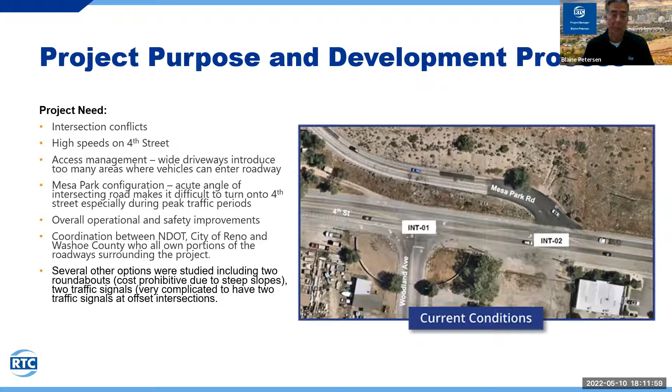The Mesa Park configuration's acute angle of intersecting roads makes it difficult to turn onto 4th Street, especially during peak traffic periods. Overall, there are operational and safety improvements requiring coordination between NDOT, City of Reno, and Washoe County, who all own portions of the roadways surrounding this project. Several other options were studied, including two roundabouts, which was cost prohibitive due to steep slopes, and two traffic signals, which is very complicated to time with offset intersections.

The intersection improvement study conducted in 2019 recommended limiting access on 4th Street to reduce conflict points for entering vehicles, providing bicycle and pedestrian facilities within the project limits, and using a roundabout to provide traffic calming geometry to reduce speeds on 4th Street for entering vehicles. The roundabout design accommodates truck traffic as well as emergency response vehicles.

Movements were modeled via computer simulation, which can be viewed on the project website. The project also includes lighting, specifically in conflict areas including pedestrian and bicycle areas. Minimal landscaping is recommended for any landscaping areas to avoid long-term maintenance costs. Right-of-way was required for this project and is in place.

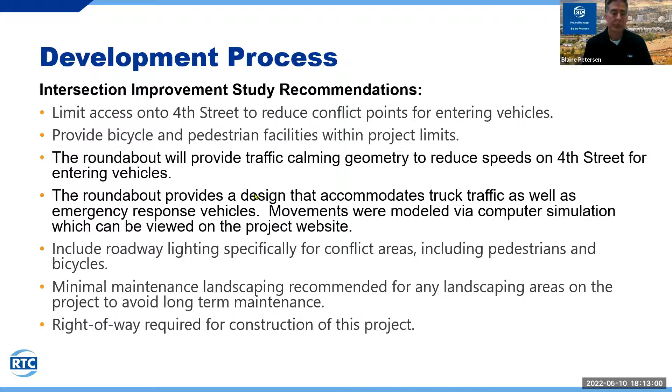The Mesa Park intersection design vehicle was the Reno Fire mid-aerial fire engine, and the roundabout design itself used a WB67, essentially an interstate truck that you see on freeways all the time. The existing drainage patterns are to remain the same; we're not disturbing what's out there.

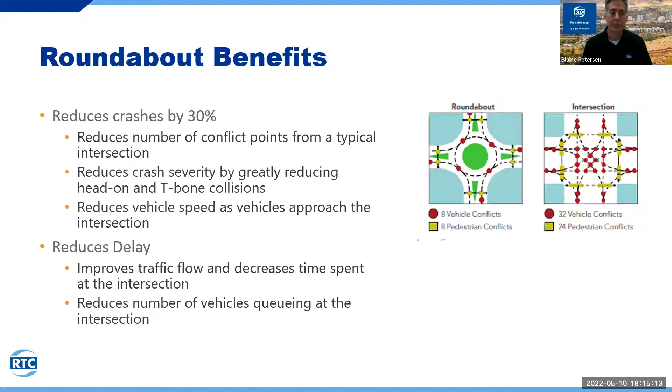Some of the benefits of roundabouts: they reduce crashes by up to 30% because they reduce the typical number of conflict points versus a standard intersection. They reduce crash severity by reducing head-on and T-bone crashes, and reduce vehicle speeds as vehicles approach the intersection. Roundabouts also reduce delay, improve traffic flow, decrease time spent at the intersection, and reduce the number of vehicles queuing.

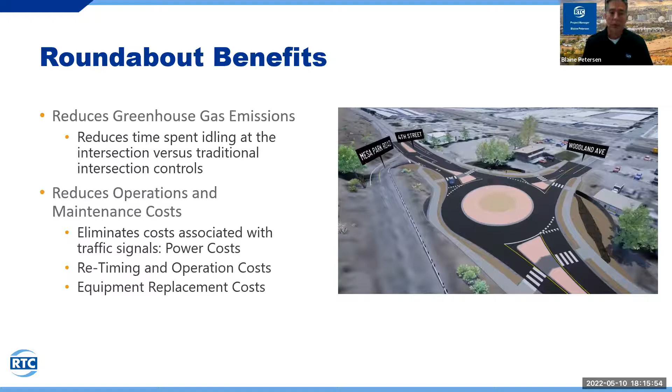Roundabouts reduce greenhouse gas emissions by reducing time spent idling at an intersection versus traditional controls such as stop signs or traffic signals. They also reduce operation and maintenance costs, eliminating costs associated with traffic signals and power, even though we will have street lighting using LED lights, which use less power. With traffic signals, there are also costs to retime them, operation costs, and equipment replacement costs.

Roundabouts also increase pedestrian safety. They reduce the time at risk for pedestrians by having two-stage crosswalks on each leg using pedestrian refuge islands. Pedestrians only have to look in one direction for each crossing, and vehicle speeds are reduced at the crosswalks. Roundabouts also enhance aesthetics and provide opportunities for community and corridor placemaking, softening edges and adding visual appeal by using central islands for landscape features and decreasing the amount of pavement.

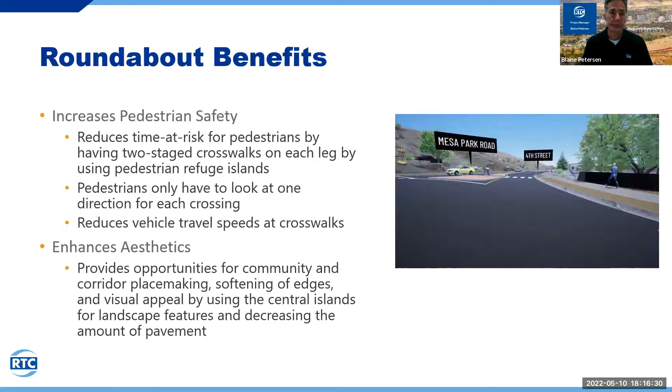The project is currently being advertised for construction bids. The bid opening is this Thursday, May 12th. I anticipate the start date as June 6th, with an 85 working day contract, so we should be completed sometime in October of this year. That's it—if you have any questions, I'd be happy to answer them.

Mac Rossi for the record. I'm kind of familiar with that area there. What?

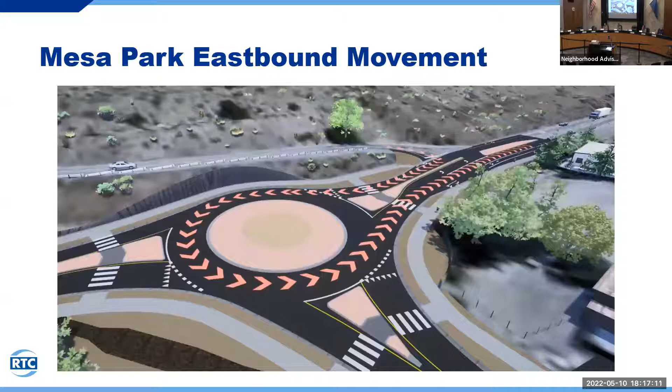This is the old highway, if I'm not correct. You are correct. Speed limit is 50 miles an hour. Am I correct on that? Or I may be wrong, but I think it's 50 miles an hour. Is something going to be posted in advance on both sides to alert people that they got to go in a circle? Absolutely. What is that going to be?

As with any other roundabout intersection, there are warning signs prior to the intersection showing there's a roundabout ahead with a diagram of a circular roadway, as well as street name signs directing traffic to the various roads. So what do you anticipate as a speed limit as you approach the circle or go around in that roundabout? The advisory speed limit will be 25 miles an hour. And that'll be posted in enough suitable time for people to not get dizzy, I guess, huh? Yes. Okay, thank you.

Shirley Borchard for the record. My only concern here, I do travel this street every day, morning and night, so I get to see the full impacts of this area during rush hours, if you will. My big concern would be specific to the evening and afternoon, and it's been a concern of mine for several years, for Mayberry Park, Mayberry Drive, which is just another maybe half mile up the road here.

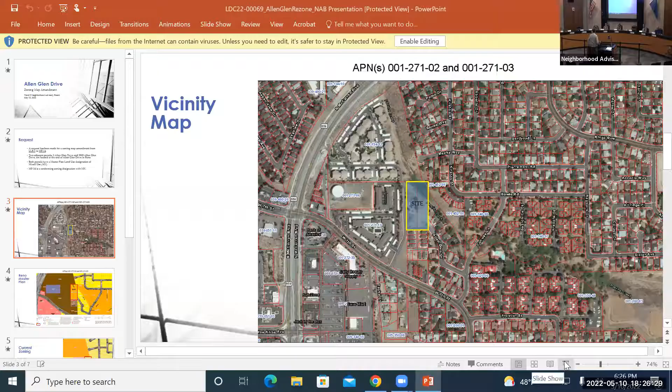Good evening, for the record, John Munson with Venture Engineering. I'm here representing the applicant, who are also the property owners. And I think this is my... yes, okay. I'm sure that works.

The site is located, it is a request for zoning map amendment on 2 1-acre parcels to MF 14, currently zoned LLR1, but very out of place, not in conformance with the master plan. The master plan actually only has 2 compatible zonings: small lot residential SF 11 and multifamily 14. So it's a mixed neighborhood master plan, a transition master plan from residential to multifamily, sort of a medium density master plan, as is the zoning of MF 14.

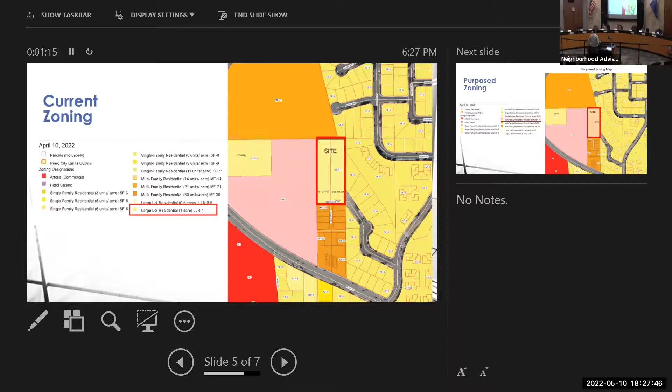So the site is located at the end of Allen Glen Drive, which is located off of Conway Drive, which is located off of West 7th Street. And the site is illustrated there, the 2 parcels next to each other. That's the master plan, which is MX. Current zoning LLR1. And then how the zoning would be after the amendment, if approved, to MF 14.

The site right now, those 2 parcels are highlighted in red there. One parcel is completely vacant. The one on the left does have a small house. It's currently occupied, it's a rental for the owners.

The owners are actually the developers of the 12 lots to the south, 12 small homes. And if they would be the ones developing this, it would probably be a similar development with a street going down the middle, lots on each side. They built the homes and currently own and rent several of them. So if they were to proceed with this development, it would be a similar product. But in the MF 14, it can be apartments or townhomes, it just depends on what happens in the future and what's the best use of the property.

That's all I have for slides.

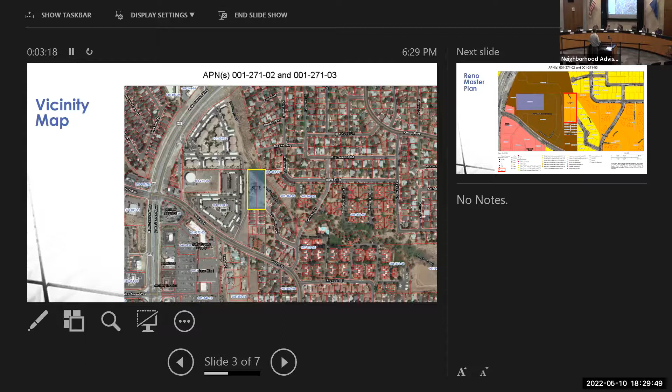In terms of support for the project, because of where it's located, it has access to existing streets, water, sewer, gas and electric, and proximity to shopping—somewhat of an infill site. I'd say it's infill because there's development all the way around it. Technically it's a vacant piece of land, but it's also infill in that it has access to all these utilities. It's not a burden on the city infrastructure to develop. It's really just an enhancement of the infrastructure that exists, bringing it up to a standard to serve additional units if required.

But there would be no road improvements other than on-site; improving the on-site road would be about the only roadway improvement necessary. RTC has a bus stop close by, so there's support for higher density.

This is in conformance with the master plan. The previous master plan was also similar to MX—it's always been planned to have somewhat medium density on this property. As you can see, we've got apartments to the left and to the north. There are townhomes across the drainage way, single family small lot to the south, and the old 6,000 square foot SF3 lots to the east.

The Peavine Drainage Way runs through the site and takes up about 20% of it, so 20% of the development is guaranteed to be open space along the drainage way. You can see the willows there—it's up above to the north, and it's pretty disturbed and barren there, but through the site there's a nice stand of willows. Those will be preserved; that will never change.

That's all I have. Any questions? I'm here to answer them.

Billy Borchard for the record. My first comment is always, have you had communications with the residents that surround the property currently? We have not, other than the people to the south who are renters of the owners. So they live there, but if everyone was notified, we were hoping that if residents had issues or questions, they would bring those forward tonight. There's also the opportunity at the planning commission. If they didn't have the opportunity tonight, they can write letters or emails, but we have not spoken to any of them.

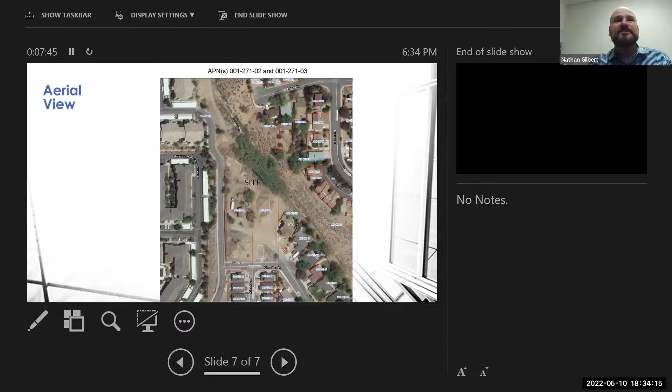Hey, Nathan Gilbert, Senior Planner. I just wanted to add, probably a little over a year ago, we started adding courtesy notices. When we receive applications, before we've even reviewed them, we send out a courtesy notice with the project description, and it has the tentative neighborhood advisory board date as well as the planning commission tentative date. My understanding from the planners is we've received several inquiries from the community on this already, but that's just an initial courtesy notice to let residents know a project has been applied for and advises them of future hearings and the neighborhood advisory board. Great, thank you very much for that clarification, Nathan. I appreciate it.

What I was saying is that it just looks well trafficked. So it appears to me, and I could be completely incorrect because I'm not familiar with the site, but I'm wondering if the people on the east or west are trying to get over to the apartments, vice versa. Are people trying to traffic this property right now?

No, maybe it's a closed off dead end, there's a fence in the back. Yeah, there was construction during the development of the subdivision to the south there. Dirt was placed, stockpiles were placed on there. Since then there's been work, there's still 2 lots to be constructed. 2 lots were built about 18 months ago, and there's still 2 lots left to build homes on. So there's still active construction activity back and forth between the two, but it is fenced off at the back.

The only reason I was mentioning it is we just had a similar project a couple months ago come up with large warehouses actually. And one of the workarounds for the residents around there was to do a little path around the back side of it so they could still get by without getting on a major road. So just maybe something to think about. That's all I have.

Bryce Chisholm: You say 14 units per acre, so I'm guessing it's 28 units. Is that what you're thinking about building? The maximum would be limited, the drainage way actually subtracts some density. I estimated about 1.6, maybe 1.7 acres of density. So you're looking at, I think it was 22 to 24 units. If it was multifamily, townhomes, it would probably be a little less just to fit them on there. If it was a similar product to the subdivision that's there, it would probably be more like 14. So it's just the size of the dwelling and whether it's detached, attached, or in a two-story building, and that's another important factor. MF14 only allows two-story, so it can only be two-story if it were to be apartments.

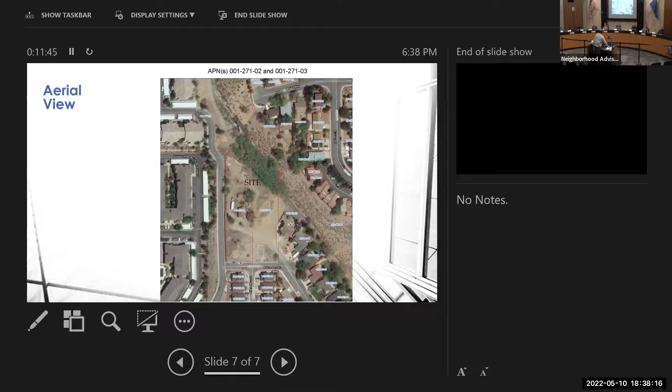There we go. Yeah, all right, so right there, it's a little smaller view, but just a hammerhead. Got 8 lots and then 4 on the back of the hammerhead, and those have guest parking here and there throughout. So that's probably the most dense you could get with an attached product, and it's very functional and they're very nice homes. In fact, I think the current owners would like to build 2-car garages, so it would probably be a little bit bigger product if he was to go forward with it, just because a 2-car garage seemed more reasonable for the tenants. Those are all 1-car garages right now.